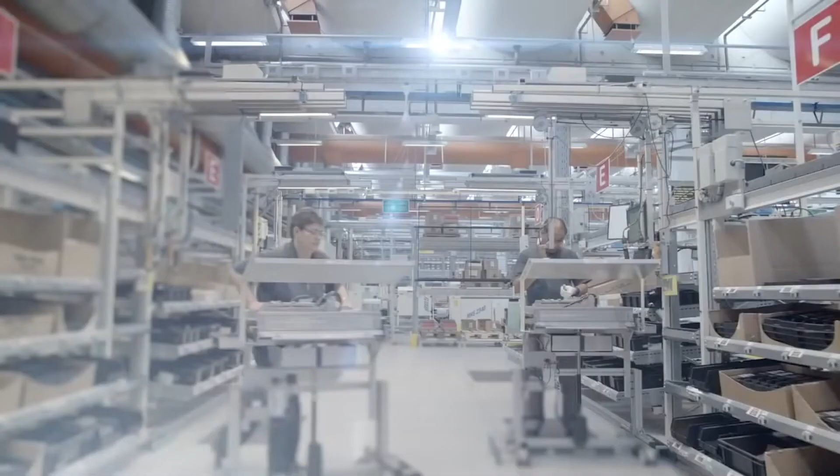For Danfoss, to achieve more from less takes hard work, knowledge, engineering, and belief that bit by bit we can make the impossible give way, so what begins as hope becomes the reality of tomorrow.

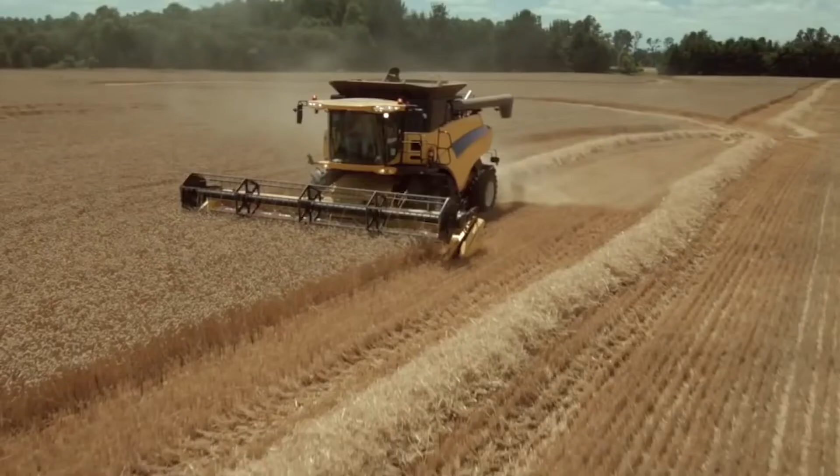This is how Danfoss is engineering tomorrow.

Mobile hydraulics engineered to deliver improved performance and efficiency, making a difference where it counts.

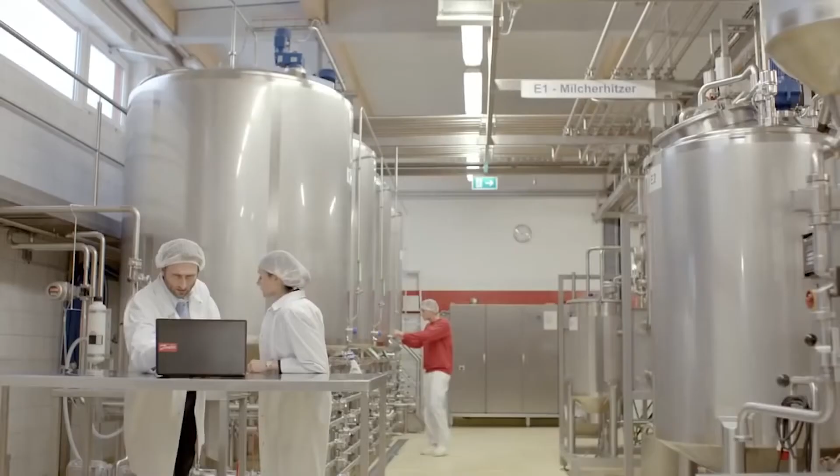Food production and large-scale manufacturing engineered to save energy, prevent waste, and increase quality.

Infrastructure solutions that help build the cities of tomorrow and raise the standard of living for millions.

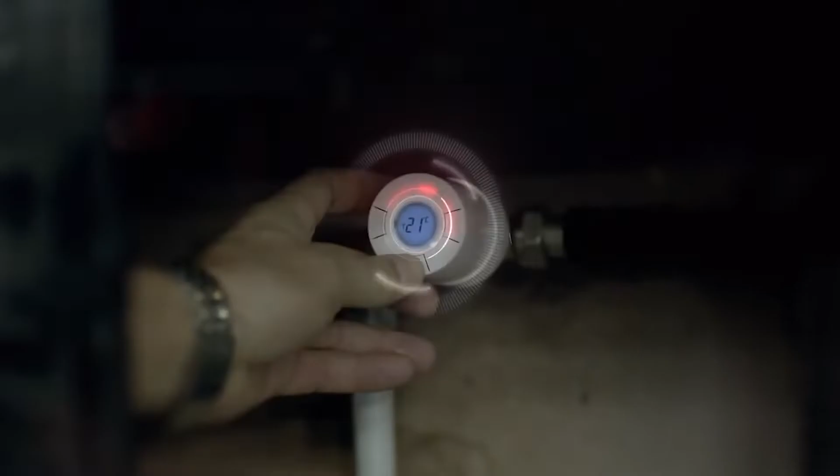Indoor climate solutions that bring intelligent heating, cooling, and control to both the coldest and warmest places on Earth.

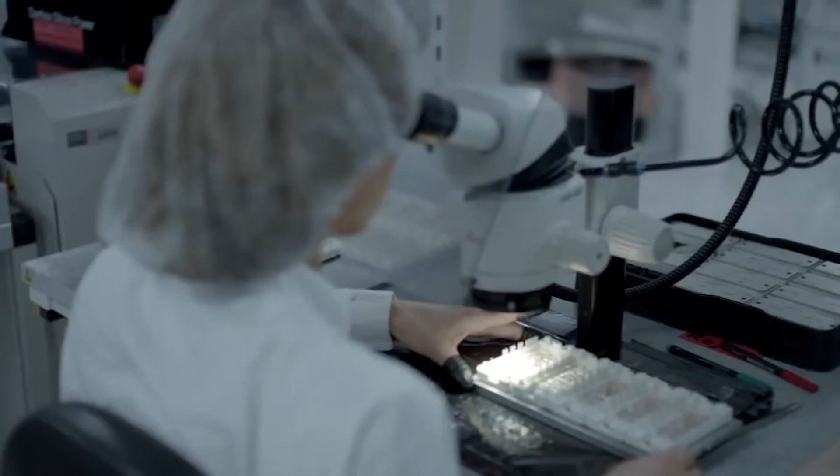This is what drives us: to achieve more with less, to relentlessly work harder and engineer the dreams of tomorrow, today. For you, for us.

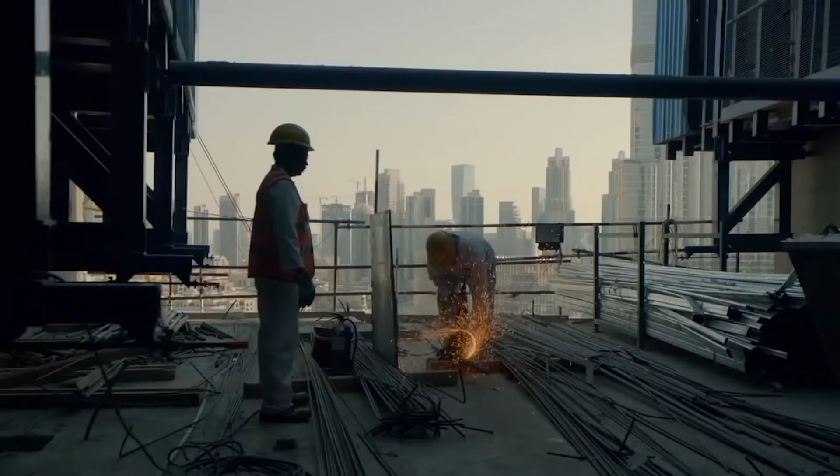Step by step, realizing the potential of this amazing world. We are Danfoss, and we are engineering tomorrow.

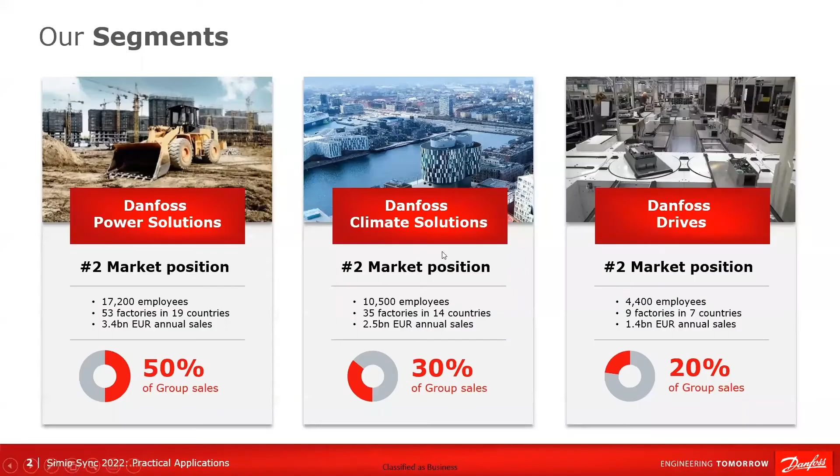Thank you. All right, so let's start by talking about the company a little bit. At Danfoss, we have three main segments. Danfoss Power Solution, which Amy and I work for, is number 2 market position. We have 17,000 employees and 53 factories in 19 countries.

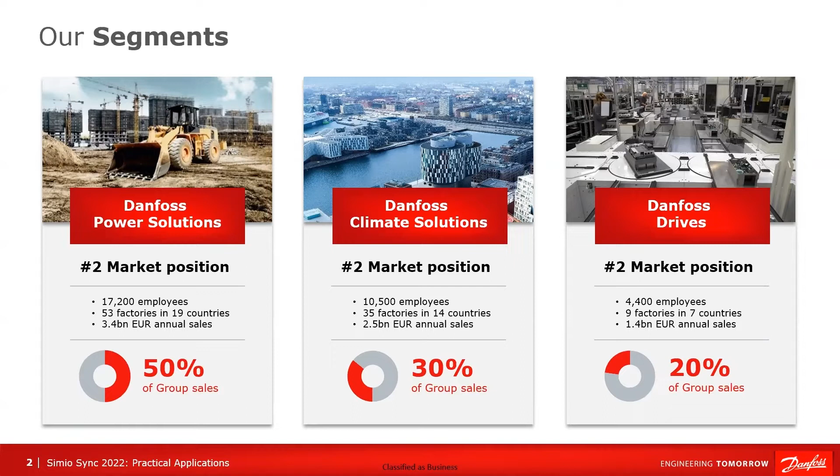We also have Danfoss Climate Solutions and Danfoss Drives. Danfoss Climate Solution has about 10,000 employees, and Danfoss Drives have about 4,000 employees. In Danfoss Power Solution, we work in different industries like construction, forestry, and agriculture, and many more. Danfoss Climate Solution works in cooling applications, district heating, and air conditioning, and also other applications. And Danfoss Drives does industries like brewery, HVAC, and automotive.

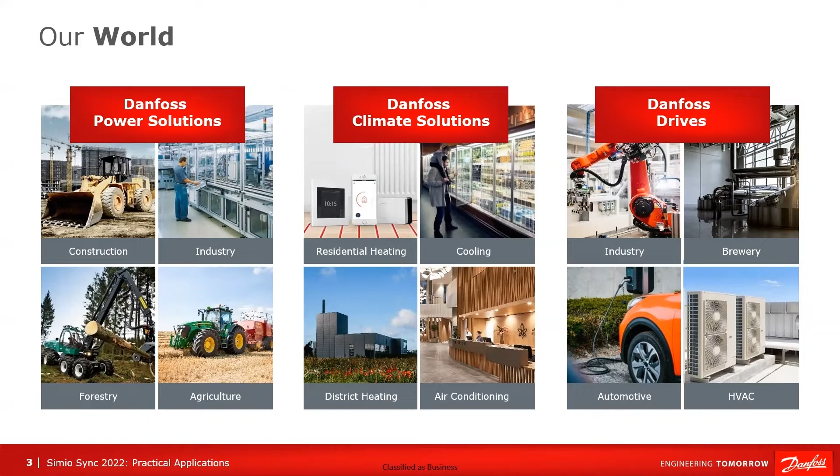We also serve different markets like marine and offshore, refrigeration, air conditioning, water and wastewater, district energy, and many more. We recently merged with Eaton, and we even expanded our footprint more.

So that was a very big transition, especially for Power Solutions. As you can see here in the map, Power Solutions had 23 manufacturing sites, and Eaton had 30 manufacturing sites. Now we have 53 factories in 19 countries.

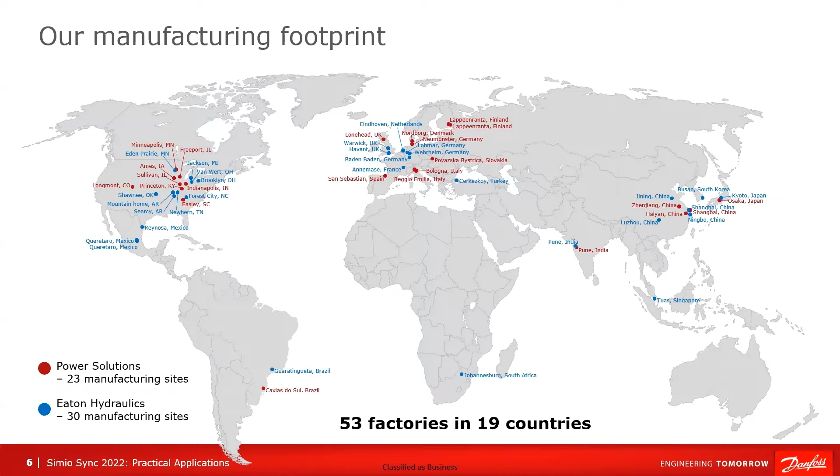All right, this is just a quick snapshot of what we do, what products we make at Power Solutions. So pretty much all hydraulic related and electrification and software. Some of the products we make in Ames, for example, are open circuit pumps. We also do other products in other power solution segments or facilities like converters, electric propel motors, radial piston motors, sensors, and vane pumps, and other applications.

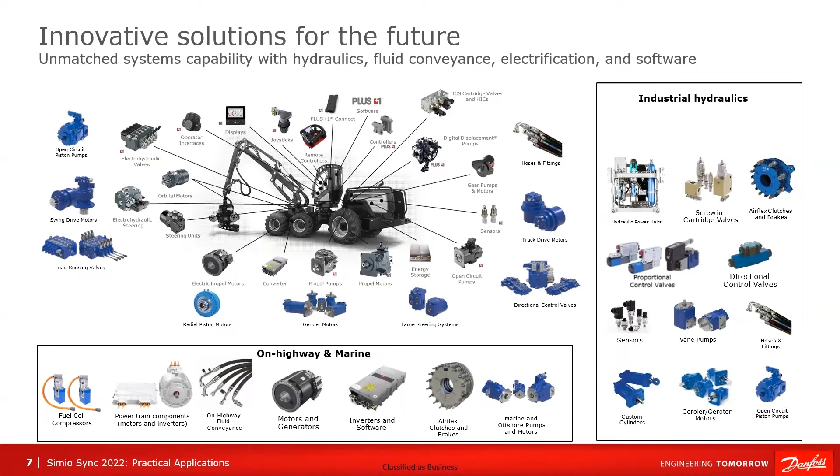So let me talk a little bit about simulation at Danfoss. We at Danfoss use simulation for different reasons. I'll speak about it locally in Ames, where Amy and I are located. There is a manufacturing facility in Ames, about 1,000 employees.

We use simulation mainly to simulate assembly lines, paint and packaging and shipping and receiving applications. I know there's many other applications that Simio can be used for, like supply chain and scheduling, but in Ames, Iowa, we're just focusing on using Simio to do assembly or basically production line simulations. Globally, we have a bigger simulation team.

They are mainly focused on prototyping and optimization of hardware, basically finite element modeling and optimization of pumps, motors, and other devices or products that we make. Only recently did they start looking into production line simulation.

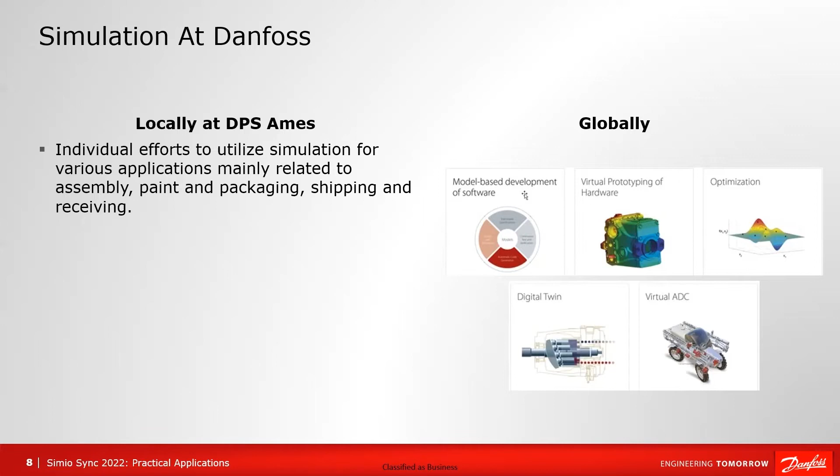We use Simio in Danfoss to study some layout changes or layout designs that we want to propose or develop. We visualize transportation and material flow, and we also do analysis on equipment and bottlenecks to understand how we can resolve issues or make production faster and increase throughput.

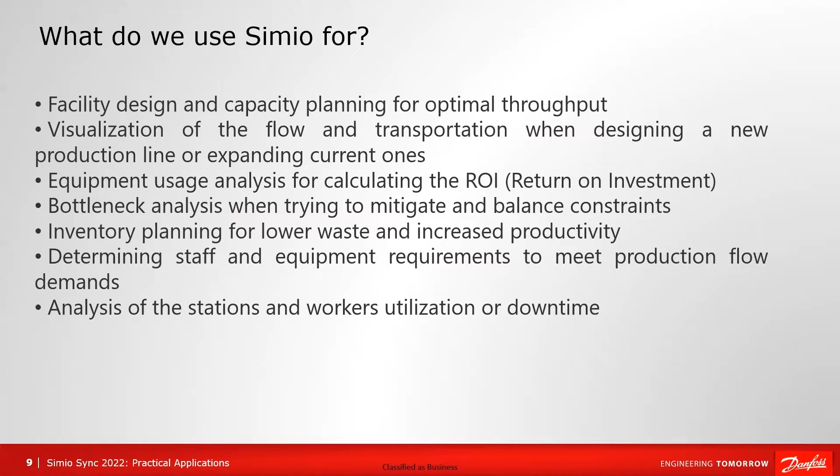We started using it recently to understand how different staffing capacity or absenteeism would impact production in our facility. So today, since this Simio Sync is about applications, we thought let's pick three models from what we worked on in the past and talk about them a little bit.

Going to give you a quick overview of how we use Simio in the plant and how it helped us make some decisions in the past.

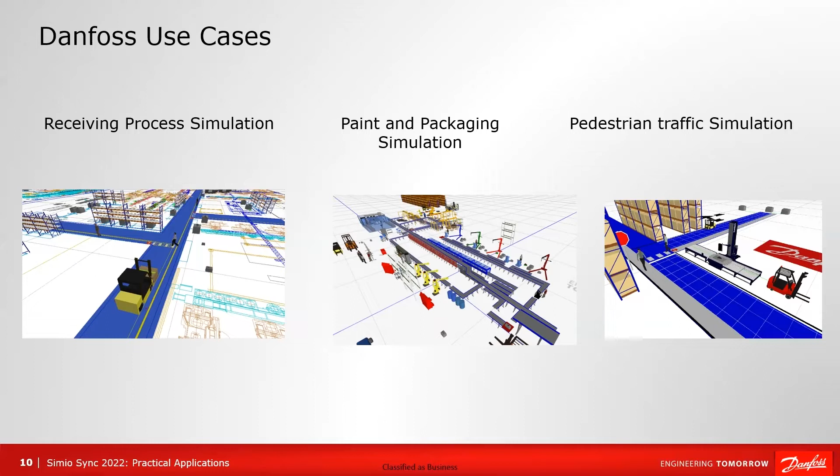So I'm going to start with use case one. For every use case, I'm going to define a problem, tell you about the model, how we constructed it, and then the results.

For the first use case, it was about our receiving department. That receiving department handles all the incoming material, which is used in the assembly lines, but between the warehouse and the assembly line there is a receiving department. We have to receive parts first from the warehouse, and then they get delivered to the assembly line.

Our warehouse, which is a bigger facility that stores all the parts we use to build pumps and motors, sends us a truck every 4 hours, so we get a truck full of skids every 4 hours. The truck arrives at receiving, and then we have a forklift operator unload that truck.

Now the problem becomes: if the warehouse sends us the next truck in 4 hours and the forklift operator didn't fully unload the truck, trucks start to interfere. If that happens, we end up with a lot of units sitting in the receiving department that haven't been received, and those can quickly pile up and create a big mess.

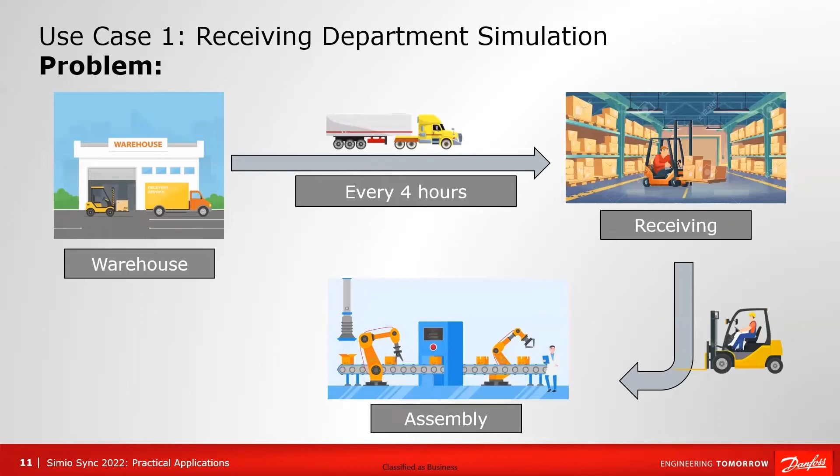So we collected historical truck data for a week, focusing on one week's worth of data from the warehouse, so we would know how many trucks arrive a day, what is on every truck, and where every skid or box in that truck goes in the facility.

We wanted to know where storage locations are—basically racks—and then we wanted to know forklift speeds, so we did some calculations to get that.

We looked at loading and unloading times and possible disruption to the delivery process. A forklift driver would be driving to deliver a box or skid, but there could be some disruption along the way that could cause delays. We constructed the model, and I'm going to talk about the model a little bit in the next slide.

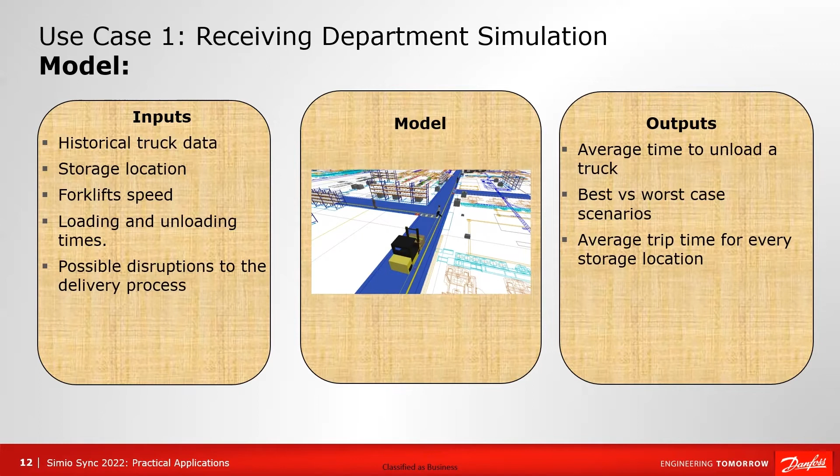The outputs we got out of this included the average time to unload a truck—basically, if we get a truck from the warehouse, how much time it takes on average to fully unload it—along with best and worst case scenarios, and the average trip a forklift driver makes to drop off a skid from receiving to one of the assembly lines.

Here's a snapshot of the model. We didn't care about all the production lines and paint lines in the facility. Instead, we only cared about our receiving department, located over here, and all the racks in the facility that those skids are going to go into.

The reason we circled this, as you can see, is the difference: if a forklift driver is picking from the receiving department and dropping off at this location, it'll take less time, versus if they want to drive all the way back to this storage location here.

The results we got from this: on the top left you can see the trip time per storage location. S45 is just a name, think of it as a storage or rack location. For some of them, it takes 4 minutes to drive from receiving to the racks, for others it's as little as 1.2 minutes. So that tells us how much time it takes for every storage location.

And then truck unloading hours. In the best case, the minimum value is 2.57 hours, so about 2.5 hours to unload a truck. There are some cases where we exceed 4 hours, up to 4.2 hours, and the average case is 3.29 hours.

The problem with those results is there could be some disruptions that change them a little bit, and we also did this based on one week's worth of data. If we had a month's or a year's worth of data, I think the average wouldn't change much, but you'd see bigger maximums and lower minimums.

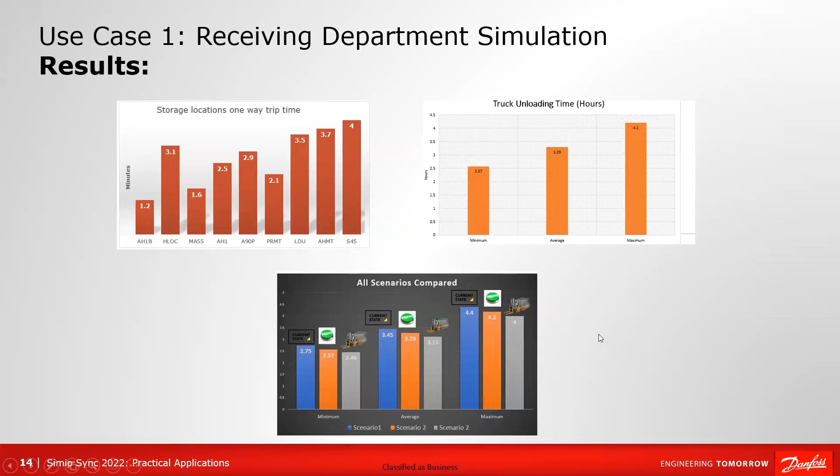We also tried to reduce some of the disruptions, but the solution we came up with was a new design where, instead of having those racks scattered along the factory, we combined them and put them somewhere very close to the receiving department. That helped us achieve the 4-hour target or even less. This has been executed and is doing fine, and we're still continuing to work on it.

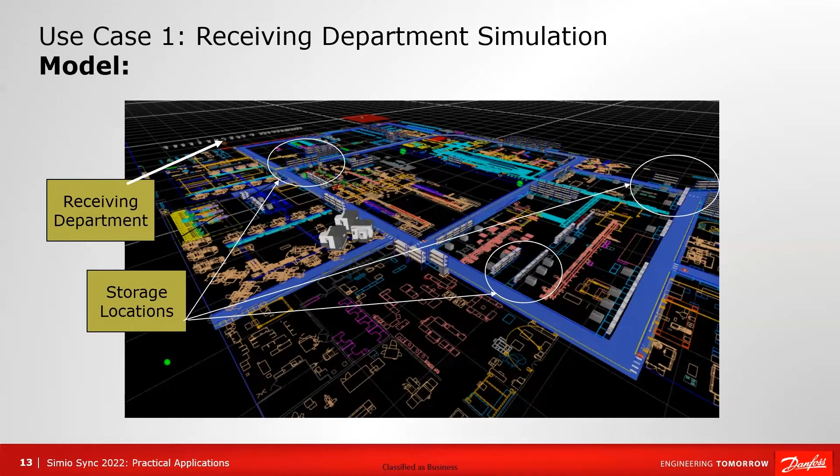So this is the first use case. We learned some lessons and had some challenges when we created the model.

One of them was truck arrival times. We had to spend a significant amount of time diving through the data to understand what skid goes where, so that data collection was a challenge.

It was also the first time we used data tables, and at that time we didn't have much experience with Simio. Instead of typing everything manually, we started using data tables, which helped us achieve results closer to reality.

Another thing was simulating racks. At that time we simulated racks as sinks, but we could have used rack objects. I know Simio has a rack object, but at that time we just made the assumption that anything that goes to a rack gets distributed, meaning it's eventually used by assembly.

The last thing is disruption to loading and unloading. There are many disruptions that could happen: a forklift stops working, people crossing in front of a forklift, a new driver who's slower than average, many things. So we had to make assumptions, pick one or two disruptions, put them in the model, and assume everything else is ideal.

And then I'm going to let Amy talk about the second use case.

And then for our second case, we went into paint. We were talking about paint and packaging simulation.

This is currently the biggest simulation we have going on in our facility. It's an active model that we continue to update. The issue was that our highest volume model, the H1 tandem, a certain type of pump that is produced, had an increase in sales, which meant we needed an increase in capacity for our lines. Currently we had 8 assembly lines and wanted to add 4 more.

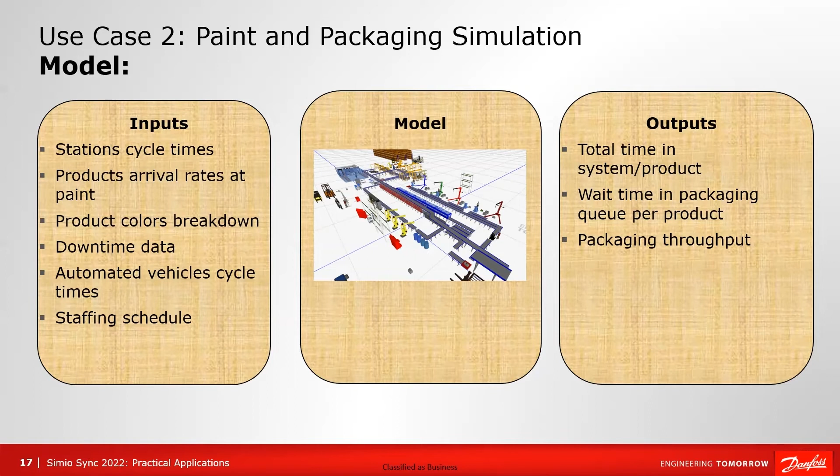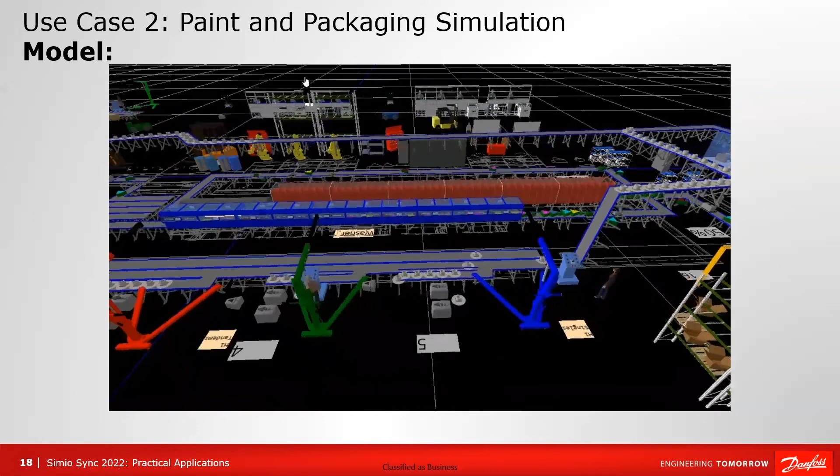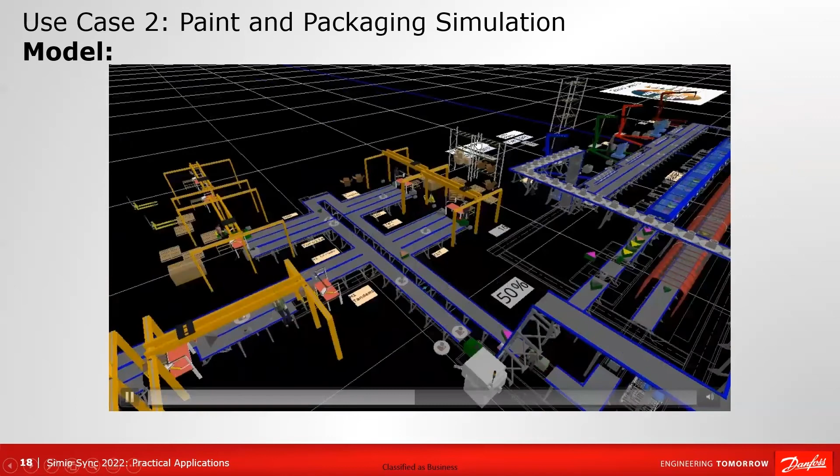There are some automated stations, such as our paint booths, and they don't have any operators in there - it's just the paint robots. We also have stations with our operators that have all the different shifts on them, so you can see how much time it takes for them to do each certain unit, because sometimes it takes longer to do one unit than another. As you can see right now, those are the pack lanes that we use.

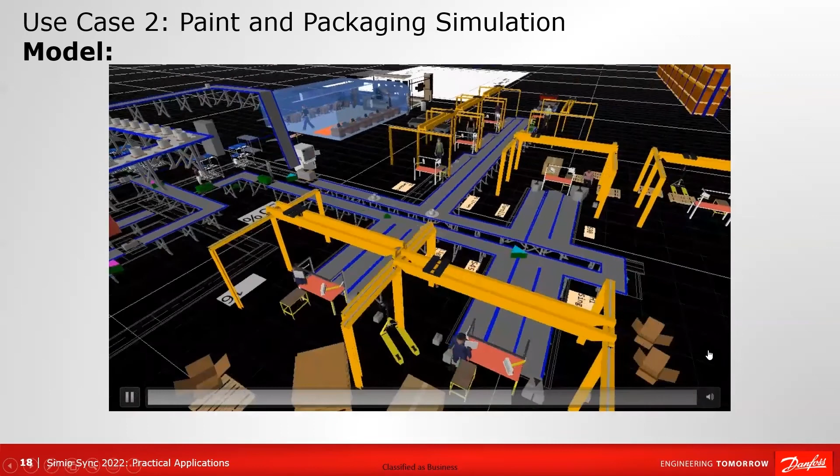And then we got results using this with all the different times that it came in.

We ended up choosing option 2. With option 1, there was a lot more congestion that could happen in the lines where our units could get stuck. Units would go down the lane - those are the triangle entities - and then once they get packed, a pallet comes back out and has to get recirculated throughout the line.

But if there was a holdup, as you can see where the green units are, all the pack lanes were being used, so everything had to be held up. We ended up going with option 2 to stop the holdup affecting all the other lines. Now, since it's an extra long assembly line, it only stops 3 other lanes instead of the other 8 lanes that we have.

We ended up executing this over a year ago and it's been working really well.

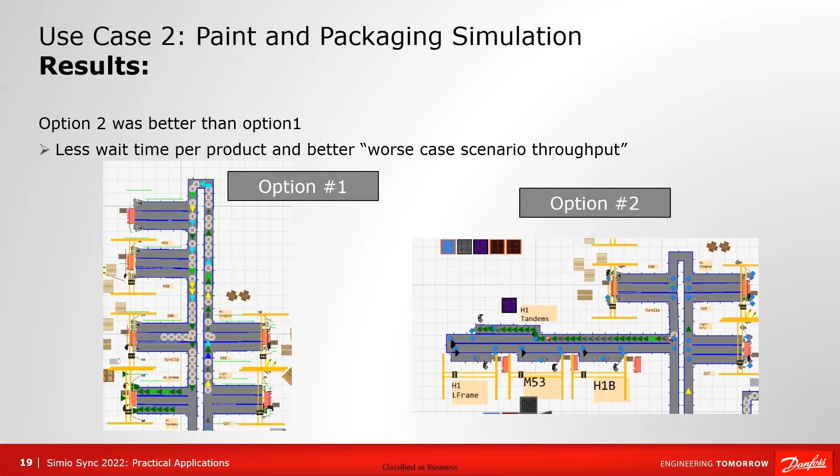Just some of the challenges and lessons we learned: for product arrival rates, we started using data tables. We learned how to import data from Excel that we got from our actual lines out on the site floor, and we got to see how many units went through the line at once. We were able to put those into Simio and import them so we could make sure it was as accurate as possible. Then we went through a bit of the process logic.

We had over 100 different add-on processes. Something such as the paint robots had to be coded to see which unit it had and then decide what color to put onto it.

The biggest problem we've had so far is that the model is becoming very large, putting all the different units and all the different processes in there. So it becomes harder to maintain because you change one thing and it can change the entire model.

And then one other big thing that we need to work on is having more documentation, so if any other engineers looked at this, they could see what we were trying to do with this model and see what each place means.

Thanks, Amy. Just like Amy said, when we started this model, we didn't know that it was going to become one of the biggest models that we ever worked on. If we can go back and document that and make it look a little bit tidier, that's one piece of advice I would give to everybody who's just starting a simulation model: make it easy to maintain and fix, and have very good documentation.

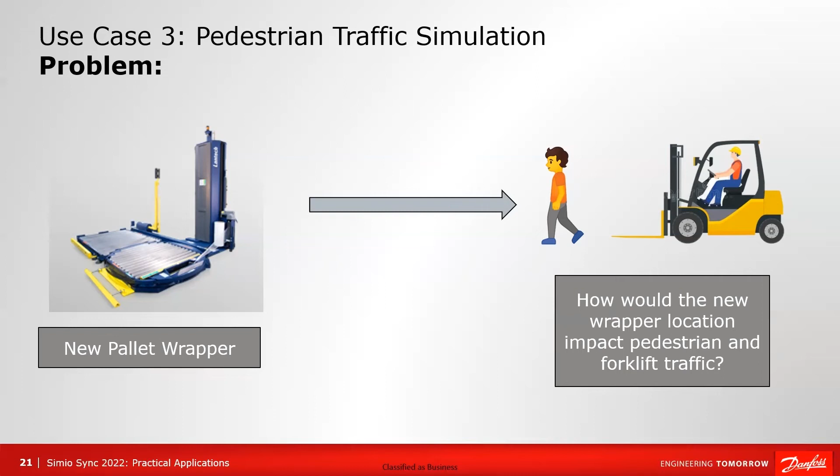So we put a camera at that new intersection location and counted how many people would cross it at a given time. We also got cycle times for the speed of automated vehicles and forklifts, and how many of those would cross that intersection during a given shift. We also had load and unload times to and from the wrapper as inputs.

And then we constructed a model. It was a fairly simple model, just the automated vehicles, the forklifts, people walking around, and the pallet wrapper. We ignored everything else going on around that area.

The outputs we were looking at were the percentage increase in traffic congestion at the new wrapper location. We needed to come up with something that tells us how much congestion we're adding if we place that new wrapper in the new spot.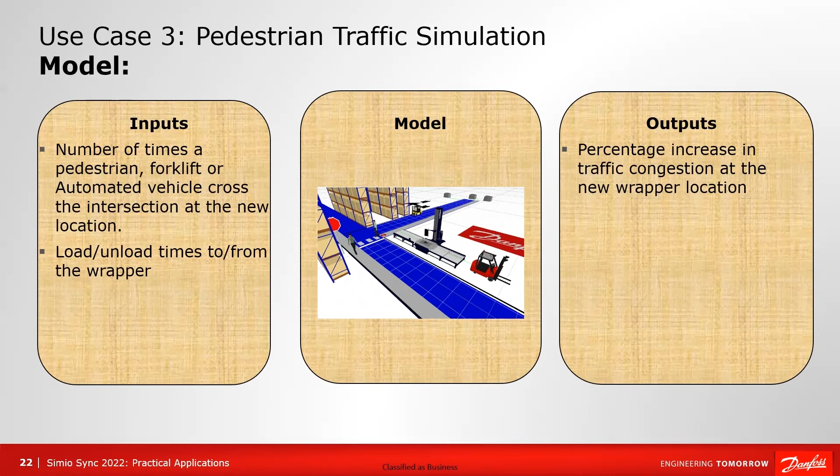So that's a snapshot of the model. You can see here a pedestrian trying to cross that intersection, but there's also a forklift. In that case, our forklift operators will wait for the pedestrian to cross, which creates larger cycle times for the forklifts.

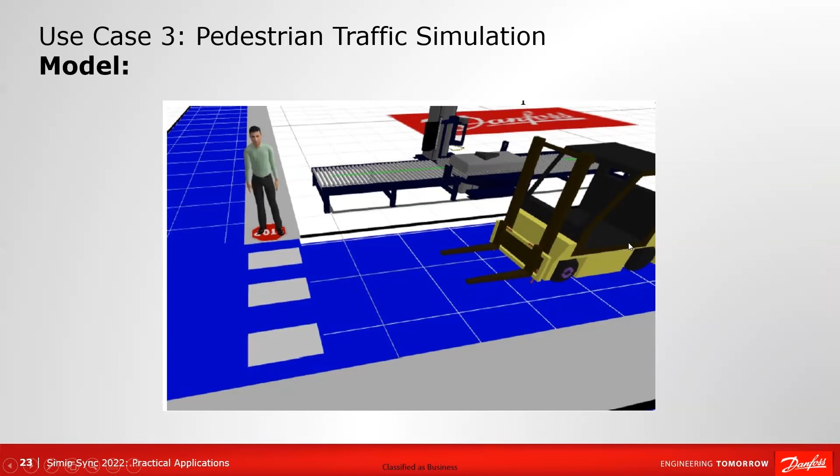And then we started counting how many incidents. Of course, it's not a safety incident, not like an accident or anything, we just call it an incident when somebody is walking by the forklift while it's operating. It happens all the time in the facility, but in this case, the forklift sometimes needs to back up all the way to the pedestrian aisle and then move forward again, so that's a safety concern.

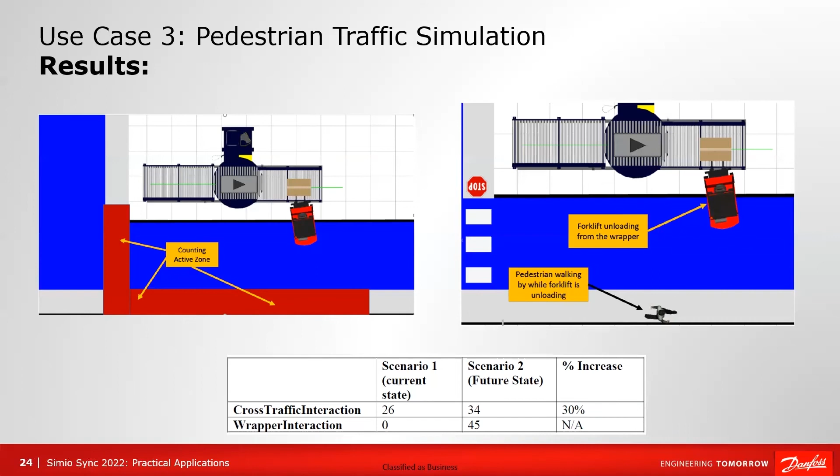We didn't have much challenges with this because it was a fairly simple model. The two big challenges, or lessons learned here, were we needed to come up with descriptive variables to describe the results. At the end, somebody's going to ask you to make a model, and they want to know if it is safe or not to put a wrapper here, but they don't tell you exactly what you want to measure. So we needed to think about what variables we could come up with to make that measurable.

And then the other thing is there's a lot of moving objects. We have forklifts, we have pedestrians with carts, we have automated vehicles. All of them can cross at the same time, and we needed to put some logic here to know which one is going to wait for which. Usually everything waits for pedestrians, but then what happens when we have an automated vehicle and a forklift? Who waits for what? So we had to define that logic and put it in the model.

So we covered all three cases. To wrap up here, I just want to give a thought on what we think about the future of simulation at Danfoss. Internally in Ames, Iowa, we're at work. We are trying to grow the number of people learning Simio and knowing how to construct simple models. We're also taking the initiative to implement simulation whenever relevant, whenever we have a project where time permits and we can use Simio to really benefit us in making a decision.

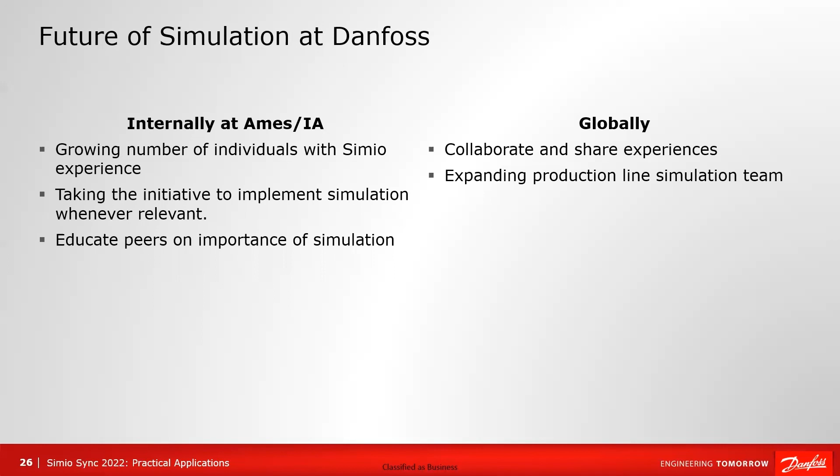With that, I think that's everything that we have here. Please let us know if you have any questions. Thank you.